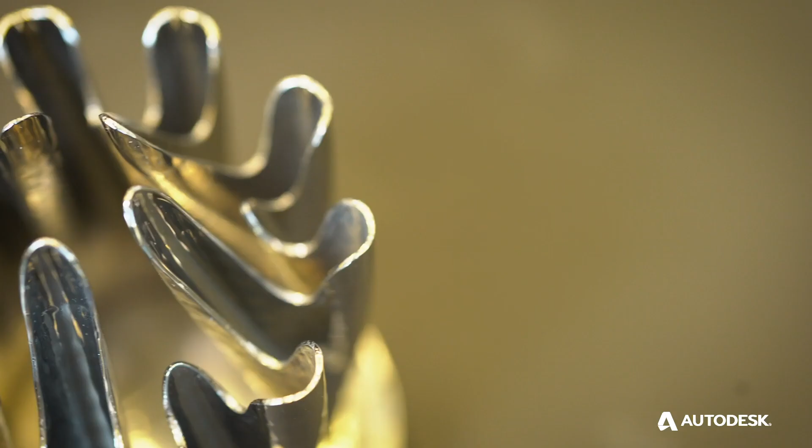The other day, during a live stream, it became apparent to me that most Fusion users are unaware that Fusion 360 includes a fully functional additive manufacturing toolset within the manufacturing extension. So in today's video, we're going to cover a little bit about what that tool is, how to access it, what's been added in recent updates, and, most excitingly, where we're going next. So if additive manufacturing is your jam, stay tuned.

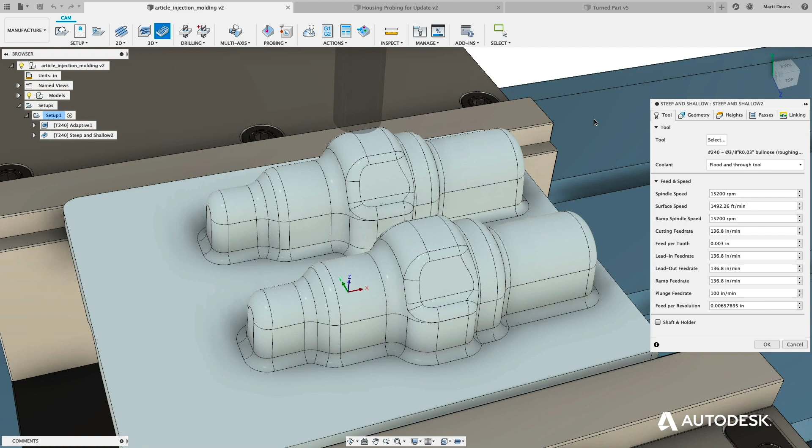So first, a short history lesson. The additive manufacturing capabilities were added to Fusion with the manufacturing extension back in June of 2019, what seems like an eternity ago in Fusion years. At the initial release, it unfortunately took a backseat to the more traditional manufacturing tools that were added at the same time, such as steep and shallow, probing, etc.

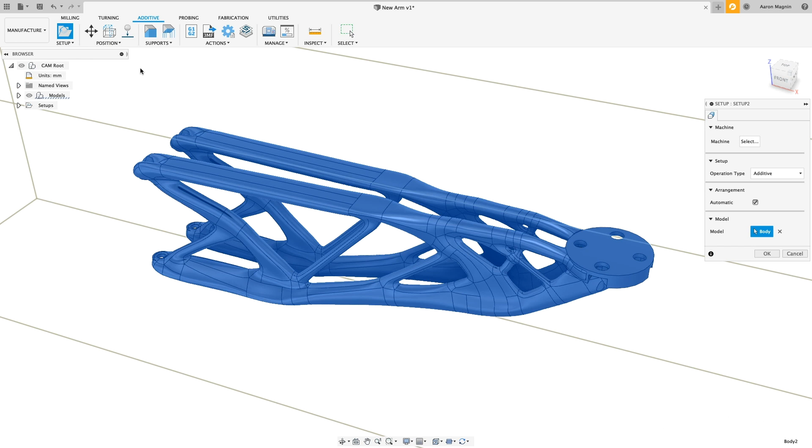Surface inspection adds verification workflows to Fusion 360. Anyway, with 4 out of 5 tools in the extension being related to subtractive manufacturing, this outsider did not get the spotlight it deserved. We're taking the opportunity to correct that now, for good reason. That's because we've been quietly adding capabilities in each update since then, with the last update bringing many notable changes.

For example, one thing we've been focused on is adding more machines. And while we've already had a fair share of those, $300K to $1 million industrial metal additive machines, we've continued to add more from companies like EOS and Additive Industries.

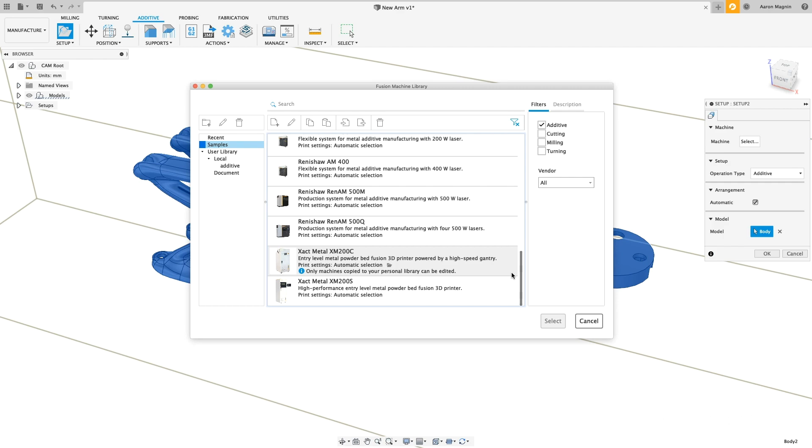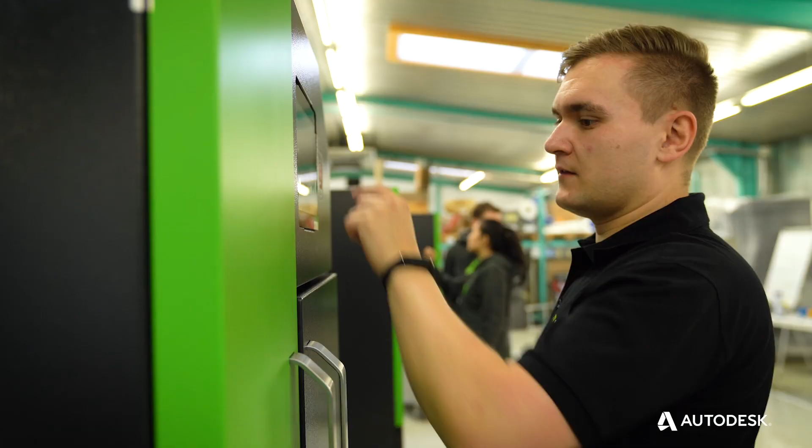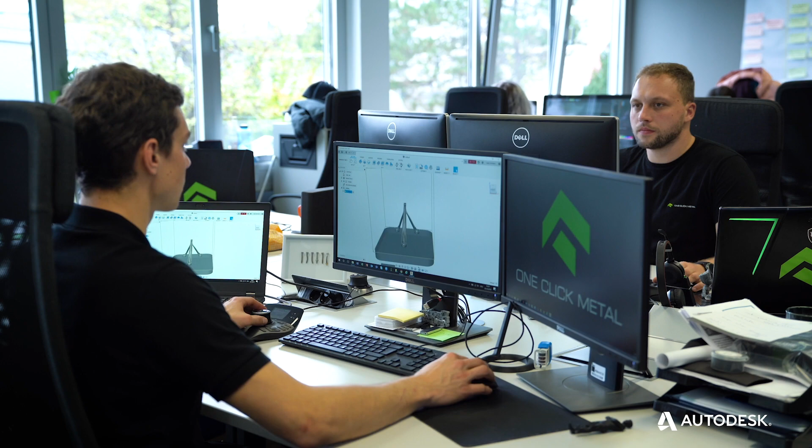However, as that price range is out of the typical user's budget, there are several companies working to change the landscape by offering machines at a more accessible price range. With the last release, we added support for 3 such printers: Xact Metal, LMI, and One-Click Metal. If those last 2 sound familiar, that's because we featured them in earlier videos. And if that price tag is still out of range, well, you'll just have to see what's coming soon.

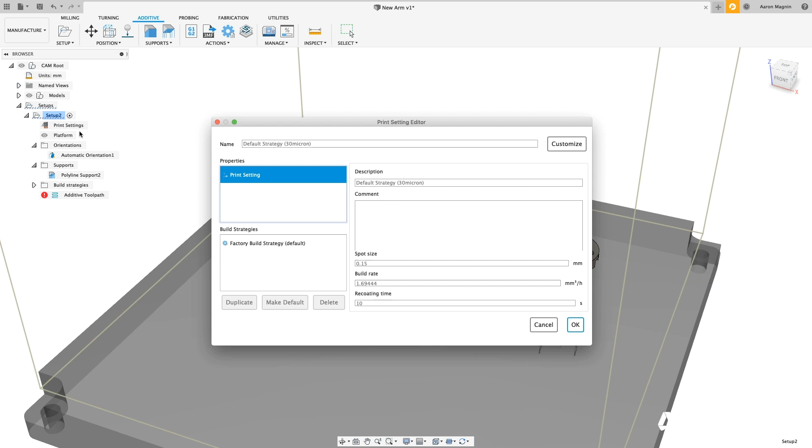In addition to the new machines, the development team focused on improving the usability and capabilities in a number of ways. We've added 2 new support structures and a print settings editor, which allows for simple customization of the build strategy. We've added automatic part orientation to determine the best possible orientation based on the ranking criteria of your choosing. Want to minimize supports, support area, bounding box, or part height? Adjust here, then peruse the various options, as simple as that.

And last but certainly not least, we added a slice preview. To get started using this extension, go about adding it from the wrench in the upper right of the UI. Once you've enabled it with cloud credits, you'll have access to those operations immediately.

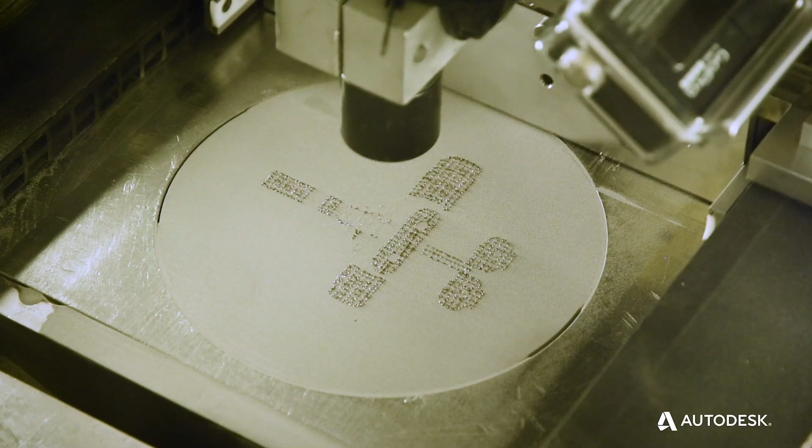Finally, and probably the most exciting prospect about all of this is not where we came from, but where we're going. Keep your eyes peeled for additive roadmap additions, but do know some exciting stuff will be coming soon for those of us who have the most prevalent and affordable 3D printers out there, FDM.